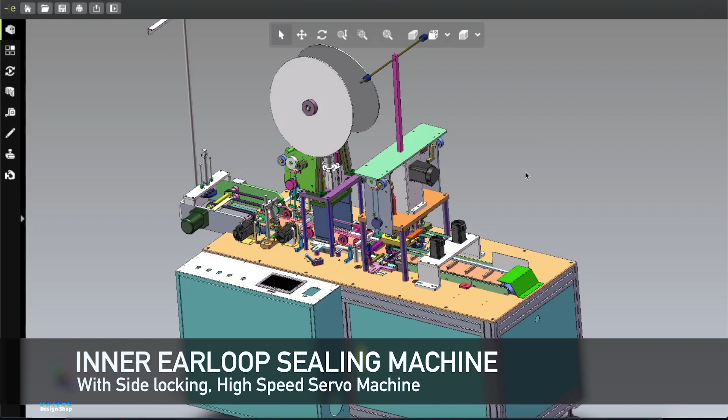Hope you are well. In this video I'm going to discuss another brand new machine design. This is the inner earloop sealing machine of surgical mask. Okay, so let me show you first what is included in this design folder.

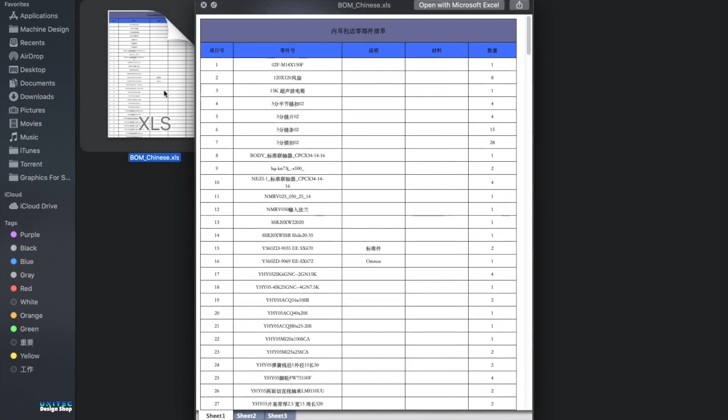At first it has the bill of materials, of course in Chinese and in English too. Okay, so no need to worry about the language. And here is the electric diagram. Here are some files of electric diagrams, and here you can see the PLC XDP file.

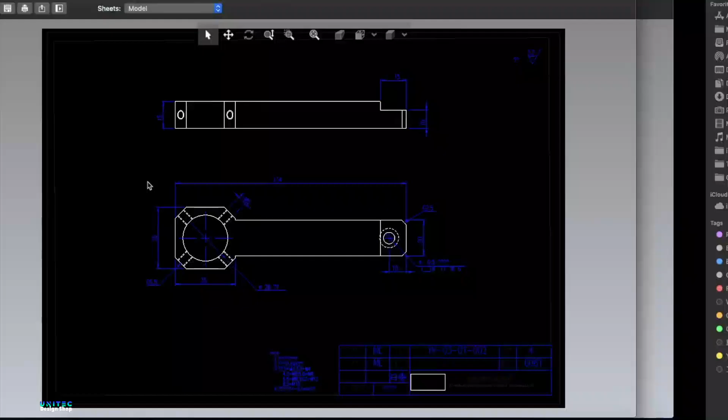And we have CAD drawings. CAD has a total of 222 design sheets. If I sort it like this, here you can see all the files. If I open one of them randomly, then you can see the files look like this. Here is the SolidWorks 2020 part file, 3D drawings, and here are the engineering drawings, STEP files, okay, assembly STEPs.

So let me go back here in this folder, and in this folder you can see there are many part files, and we will open the main file, inner earloop machine, and here is the inner earloop machine. Okay, so I'm going to disassemble all of the machine, and I will talk about the working procedure and some other functions of this machine.

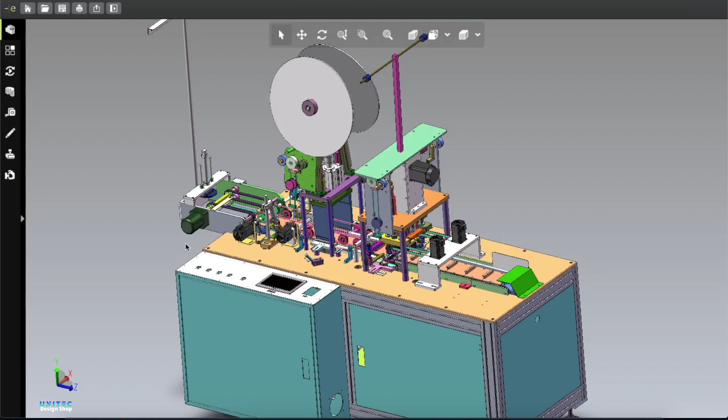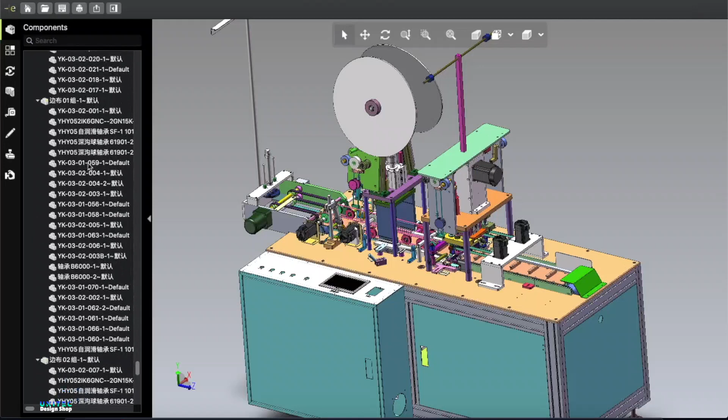Okay, so let's begin. So first of all, here you can see there are many part files, and let me check if there is any missing file. So it looks good until now. So far so good. Okay, so it looks like there are no missing files, and here you can see the different angle views of the machine, and you can get some basic idea about this machine.

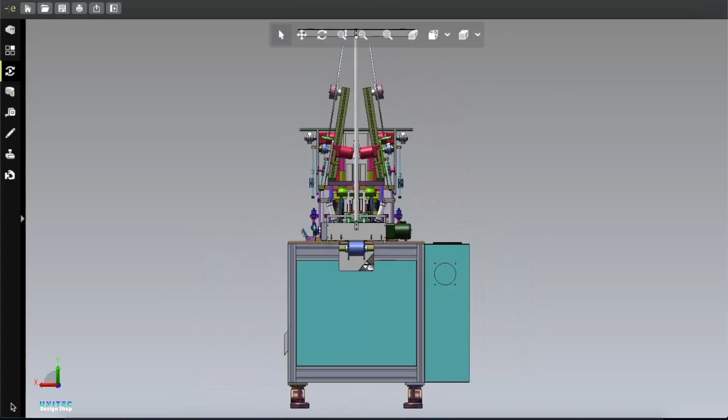This machine is a little bit more expensive because you need 4 ultrasonic machines for this one set of earloop sealing machine. Although you need 4 pieces of ultrasonic machine, this machine is a high speed machine, and you can get a very good response from this machine.

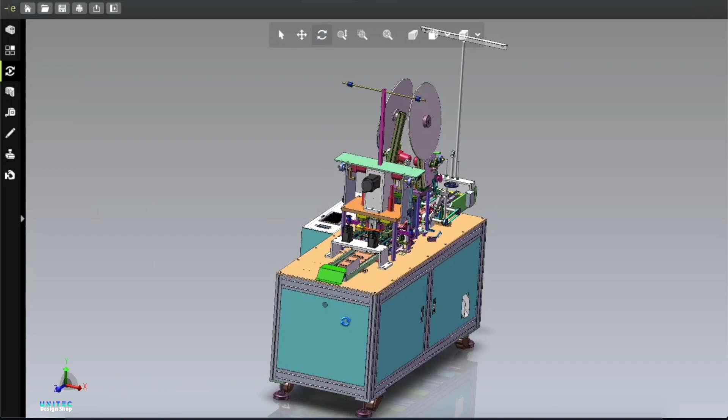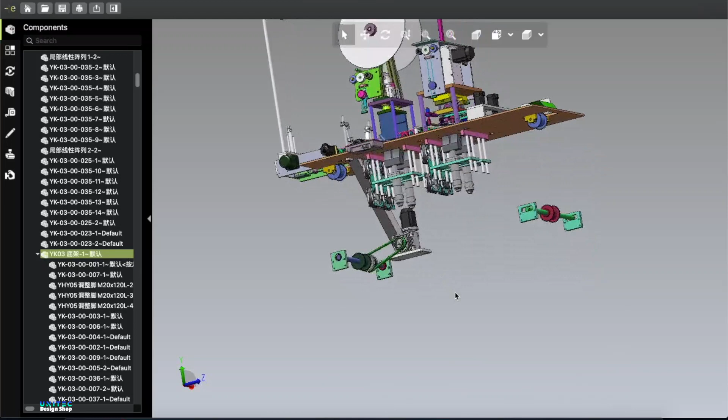So if I rotate it and start disassembling, then you can see what is inside the machine. So let's select from outside, and okay, now hide this. Okay, now you can see what is inside. Inside there are 4 pieces of ultrasonic machine, 1, 2, 3 and 4, and there are altogether 4 sets of cooling fans attached to the machine.

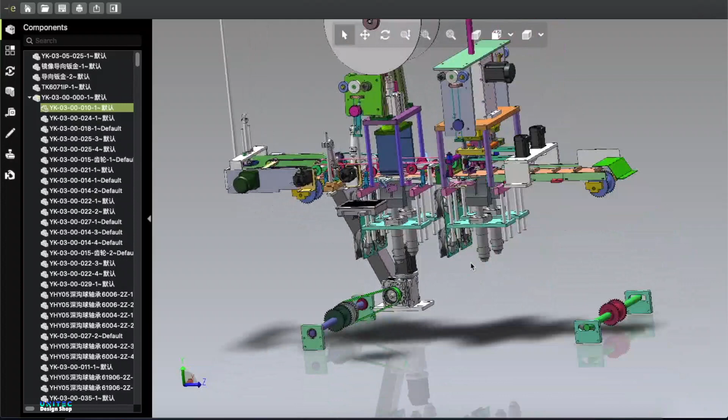Here you can see the plate. Let me hide that. Okay, now here is the sprocket, and you need a total of 1, 2, 3 and 4, and you need the chain, and you can get the chain model number from the bill of materials sheet, to run this whole mechanism. Okay, and when you run this mechanism with the help of this servo motor, this tray moves like this.

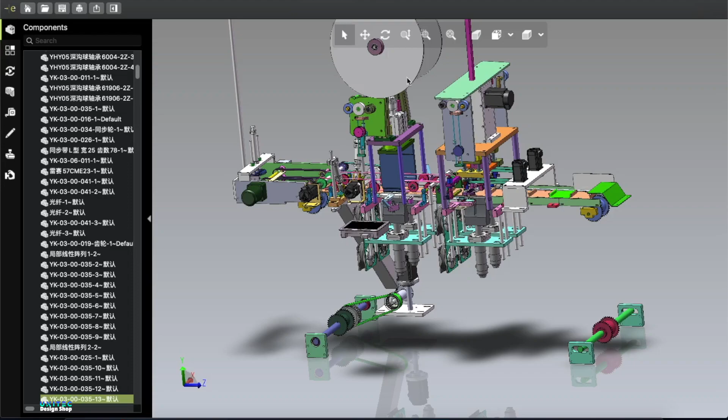Okay, and here is the main sealing mechanism, the inner earloop sealing mechanism. And if I zoom a little bit more, then you can see here is one horn and another horn on that side. Two sides have 2 horns, and you can see there is a rotatable mechanism head.

Okay, and every second this head is moving like this, and every second it is rotating, and there is a sealing head. One is here, another one is on this side. Okay, and with the help of these 2 sealing heads, it is sealing with the help of the ultrasonic horn. Okay, after sealing the mask earloop here, it will come here.

And here you can see another folding mechanism, and with the help of this folding mechanism it is attaching another piece of wrapping or side locking system to the mask. Here you can see another 2 pieces of ultrasonic machine, and with the help of these 2 other ultrasonic machines, these 2 sides get locked.

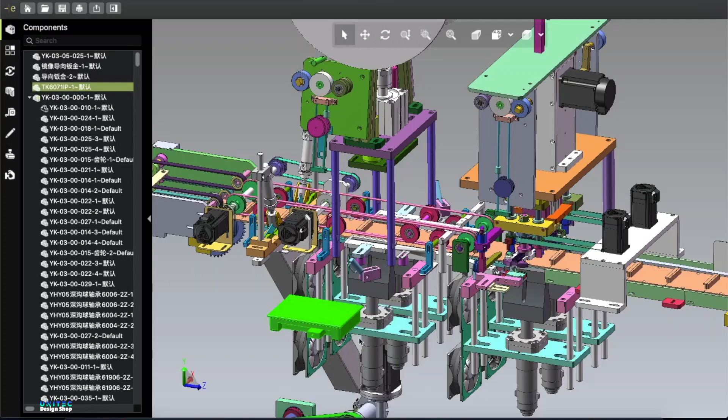Okay, here you can see the upper head, and in the downside you can see the horn, the ultrasonic horn. So for this machine you need 4 sets of ultrasonic machines, and definitely that will cost you more money, because the ultrasonic machine is the most expensive part in this machine. Okay, so

I'm going to hide a big part, all the mechanical parts here selected, and here are some sprockets and the belt. I'm going to hide all of them with one click from here. That will give us a little bit more speed, and I will take very little time to discuss everything.

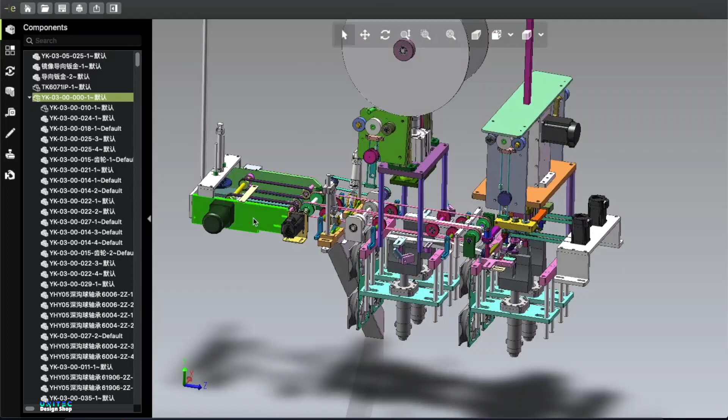Okay, so here you can see the output section, and after coming here, here is the automatic push mechanism, and it is pushing onto the conveyor belt. You can adjust the speed of the conveyor belt, like 1 2 3 4 5, then the conveyor belt moves, then again 1 2 3 4 5, and you can customize your PLC and the program.

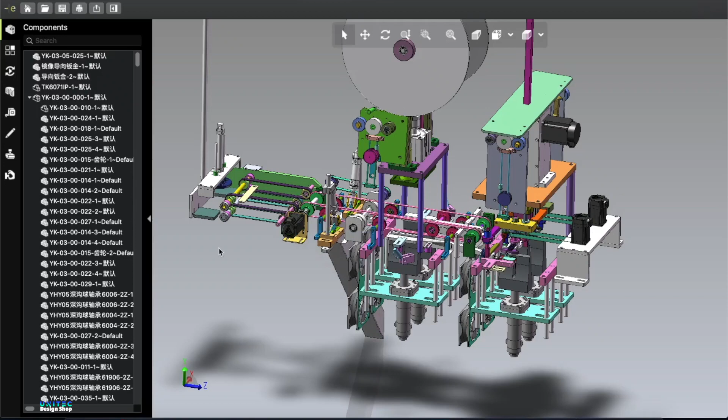Okay, so here you can see another motor. Those 2 motors are running 2 pieces of belt. These 2 belts are just receiving the mask from the machine and pushing it through this way.

So I'm going to hide this big part right now. This big part consists of 2 sets of ultrasonic machines, the frame, screws, and by the 4 screws the ultrasonic machine is attached to the table. Okay, and on this side you can see the cooling fan. So I am going to hide all of those sets with one click from the left side menu, and I am also going to hide all of the parts.

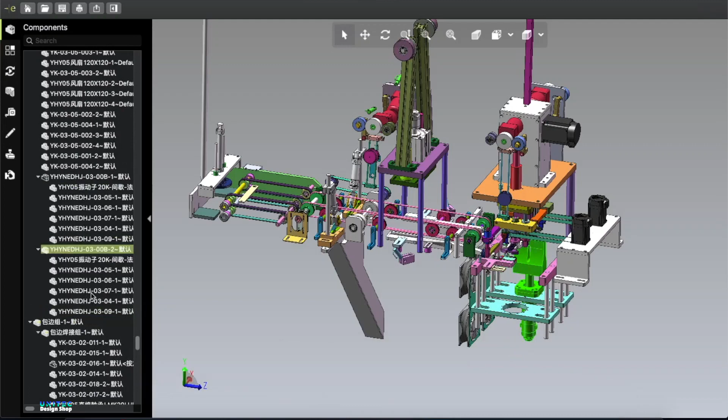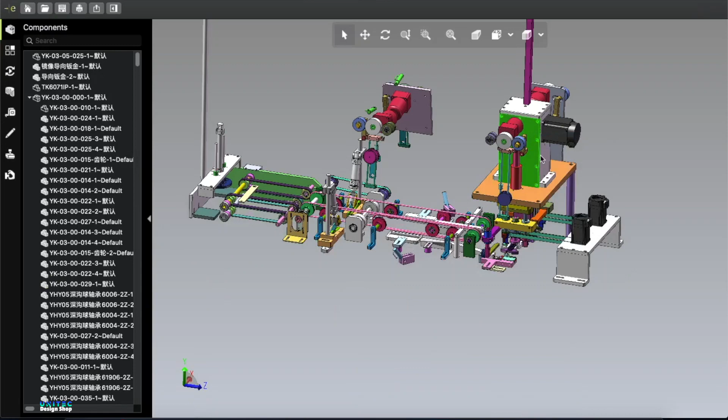We have finished most of the parts, and here are some critical parts. Here you can see the pneumatics, some rollers, some belts, and some mechanical parts. Okay, and now let me show you what is inside this magic box. I hide this, zoom in a little bit. Okay, there is a mechanical movement here, and here is the motor.

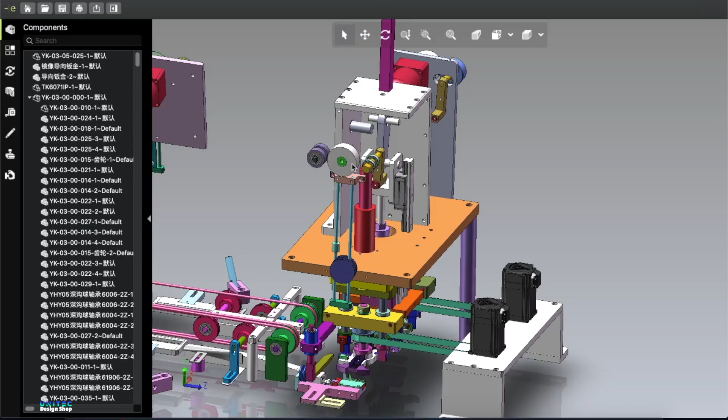By the way, you will get all the parts, details, sizes and dimensions with the design file. So if you want to make all those parts by yourself, you can, or you can buy the spare parts package from China and assemble it by yourself. That will minimize your cost.

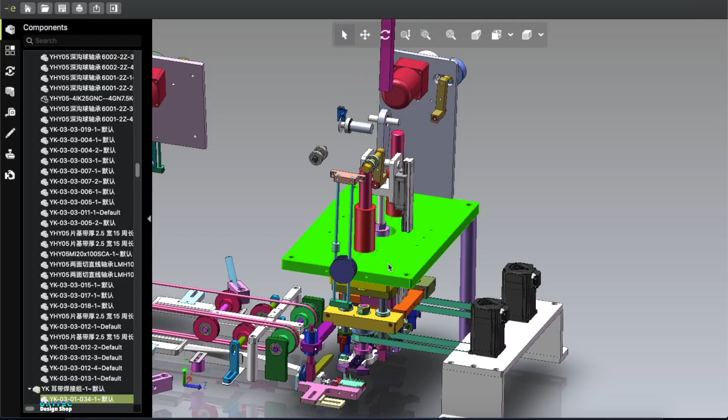Okay, and this machine is a high-speed machine. You can get around 100 pieces of mask, fully automatic system. So you can use just one line with your high-speed mask body production machine. Okay, it will be the perfect match.

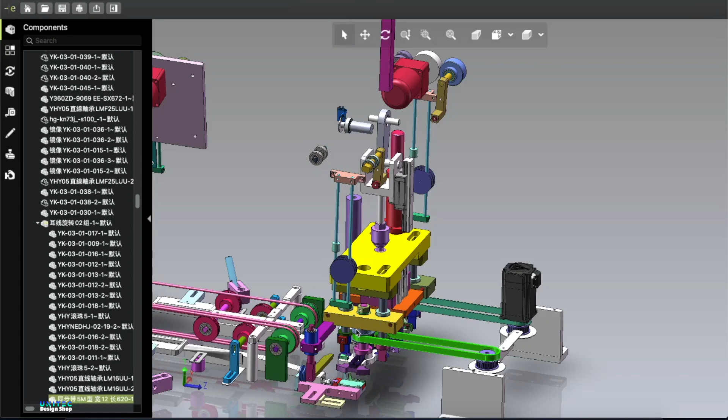There is a motor, and let me hide the frame. This motor is running one belt, and this belt is connected with another part. Okay, and this part is lifting like this: 1 2 3 4, 1 2 3 4, and it is taking the earloop and placing it in just the right place. Okay, and with the help of the sealing head, it is getting sealed. So you got the basic idea about this machine.

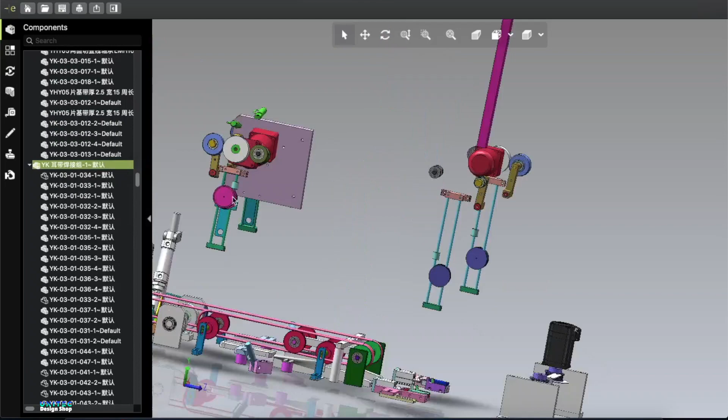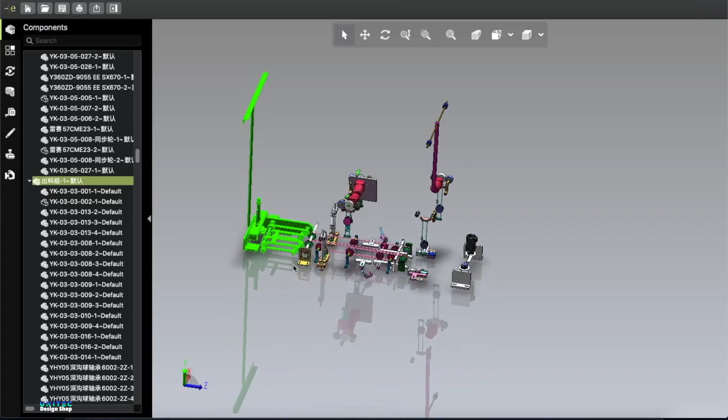Let me hide this big part too. Okay, so now it looks like we are almost done, and we have almost finished another machine. Let me hide a little bit more and talk a little bit more about this. Okay, this, okay. So now let's get everything back, and here is our machine.